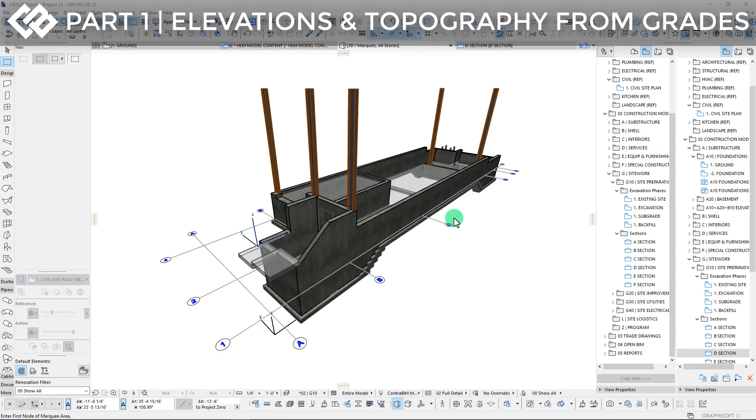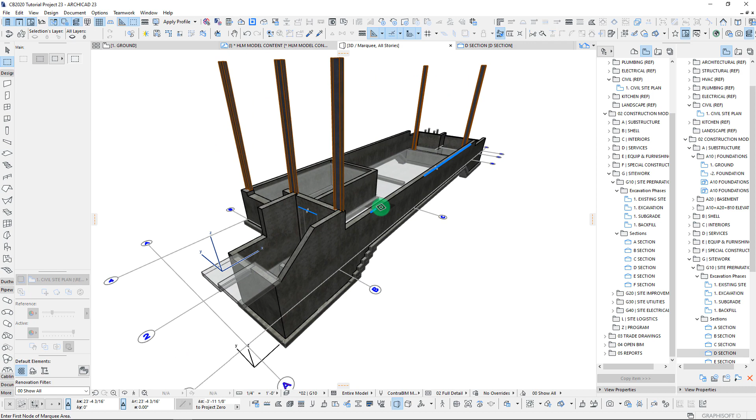Okay, welcome. In this video, we will be going through and modeling in our topography for our site. What we're looking at here is essentially our basement structure and foundations. You can see we have a lot of stepped foundations here and our whole entire basement level. We want to get our topography modeled in, because this is really going to be our starting point for working through and building up our excavation volume.

So let's take a quick look at our civil site plan here, and we'll talk a little bit about the elevations that we have, and then we will start jumping into actually modeling in the surface to represent our topography. There's kind of a lot going on in this particular drawing, but I think that's just the way the city wanted to see this.

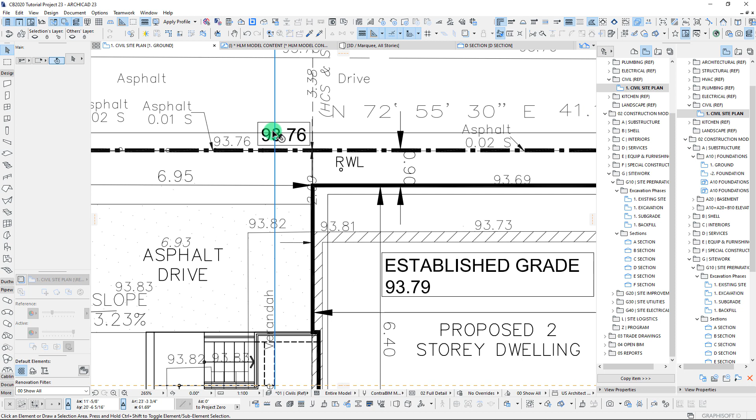I will point out that we have several different grades noted. The existing grades are the ones that are in the lighter text here, versus the new grades or proposed grades, which are darker and have a box around them. We also have the outline of our new residences here—there's actually two of them on a single site. And this hatched line running through here is actually an existing building.

So anytime I'm approaching a site like this, I always like to start with working the boundaries, by going through and tracing out essentially the extents of the topography I want to model. In a case like this, I'd want to go through and get some points in here to represent the boundaries of these structures already on site. Then from there, we'll fill in the different grades in between.

Now, if we had a drawing that was really set up with topography lines, I would approach it much differently, and I'll show a quick example of how we would do topography lines. But in this case, it's really going to be more about working with the information that we have and making sure that we can get this as accurately as possible.

So one thing I want to point out here—let's pull up a section of this particular project, one of the building sections. I want to note our base elevations. We have our ground level here, which is actually set at 0. And we can see that our 0 point for reference here is actually a specific height above grade, in this case about 5 feet or 4'9".

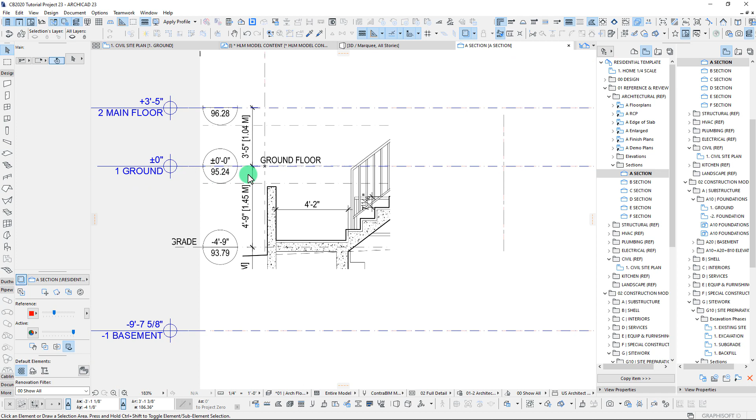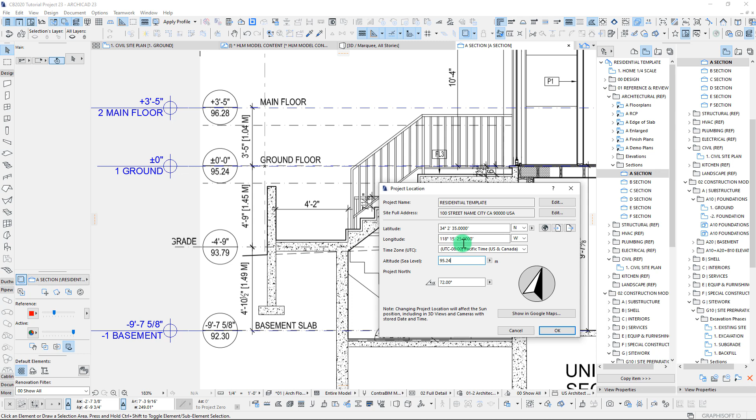So this number right here, 95.24, that is really our working point for our 0, or our project location elevation. We have this set up as 95.24. This is actually defined in meters. So when we go through and start building up our topography, we will want to be inputting these in meters.

Even though all of our dimensions and heights in most cases are actually in imperial units, feet and inches, that's one of the great things about ArchiCAD—we can switch back and forth as needed, so that when we do these inputs, we can use whatever input is needed for the available information we have.

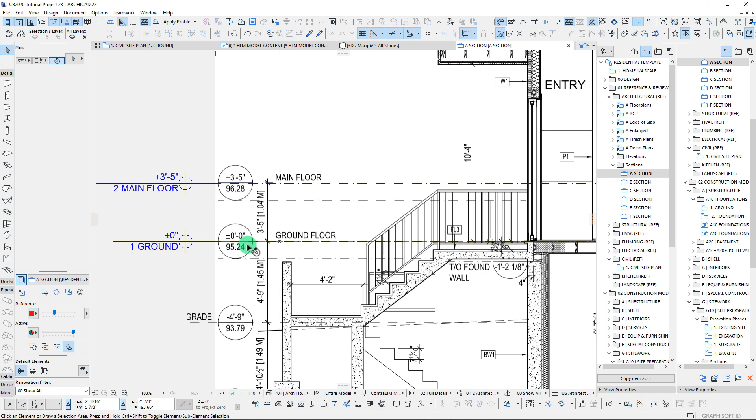So again, we've already set up that 95.24 equals our 0 point on this project. Based on that, we can then go through and start plugging in our elevations, which are also in meters here, like these 93.64—this is all in meters. Everything here is in meters for our topography.

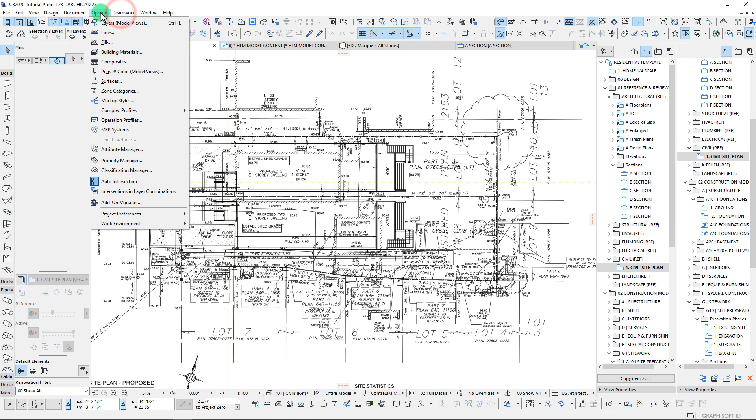So with that, let's go ahead and go into our project preferences, and we will temporarily switch over our working units from feet and fractional inches to meters. We'll just use 2 decimal points, and with that, we are almost ready to go.

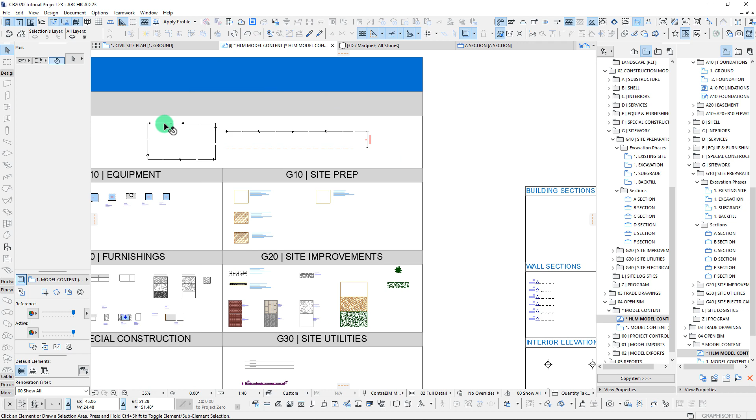I'm going to switch over now to my worksheet that has a linked reference to our model content plan. In this case, I'm just going to be picking up a mesh here that's set up for our site topo. So we're going to pick up our site existing—this is on a site existing layer. We just have it set up as site topo.

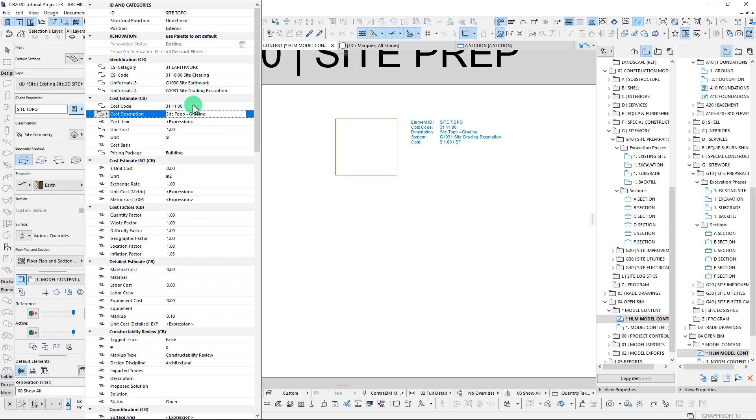We can go through and, if we wanted to set this up for calculating quantities and pricing, we can do that, of course. But for this initial pass, we won't really be talking too much about that. So we'll go through and start tracing out our boundary, and then we'll start adding some of these elevations.

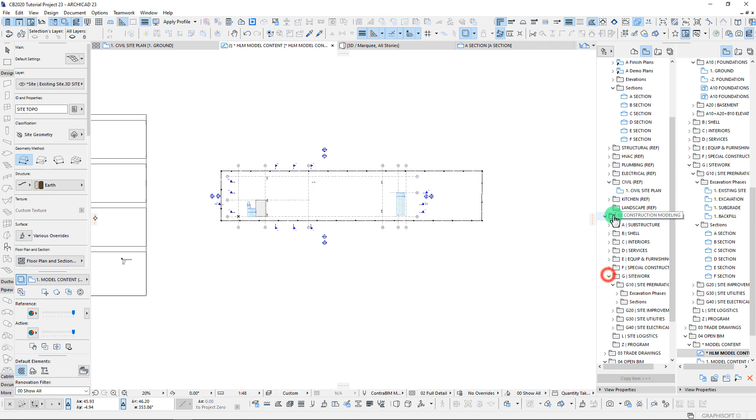I'm going to navigate down here to my construction models. I have a few different phases set up here: an existing site plan, which is kind of the existing conditions, an excavation phase, a subgrade, which is essentially after the excavation, and then we'll go back through and do some backfill in another video as we go through this process.

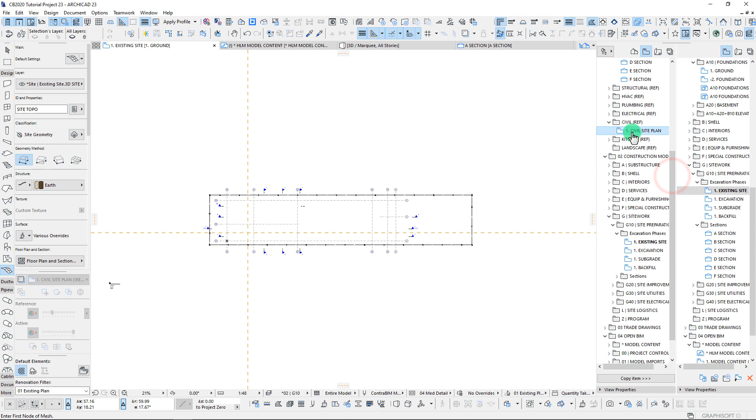Okay, first step is let's turn on our trace reference for our site plan. With a site like this, I could limit it just to the area, but in this case I probably want to pick up some boundaries beyond our actual property line. So I'm just going to start in this top right corner, and we'll do kind of the constraints or the outside bounding box of our particular project here.

We can see we have some grades up here that we can work with, so I'm just going to click through here. Off in the back over on this side, we have some grades over here too. So let's just do our extents.

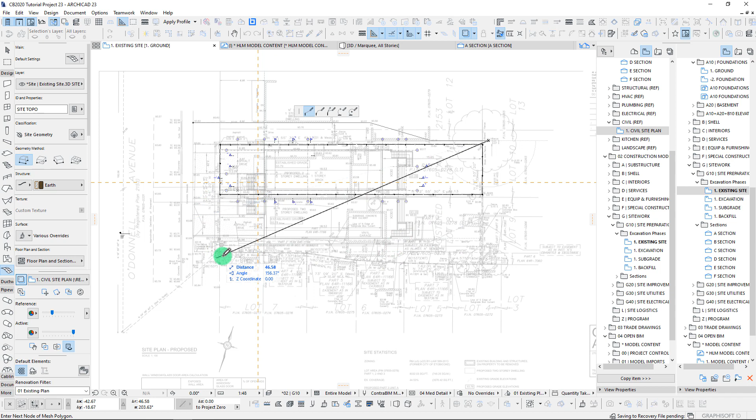We have one lot right here that contains one building, and then we have the mirror version of it on the southern part of the site. So let's take this down, and we'll take it a little bit outside of our boundaries here.

I'm just kind of looking for some points here that we can match up to our elevations. We're not going to go too much into detail here, just enough that we can get a nice boundary outside of our site. Okay, so there we go.

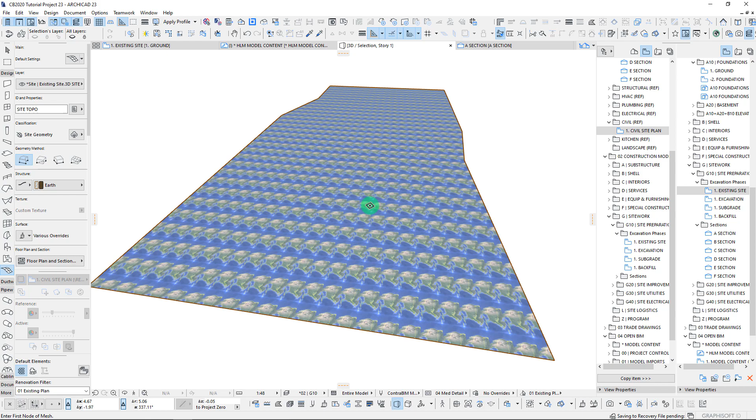We have our mesh. If we see what this looks like in 3D, we can see that we got this kind of funky texture going on. Actually, if I zoom in and look at it, this is just a placeholder here for loading in Google Earth satellite imagery.

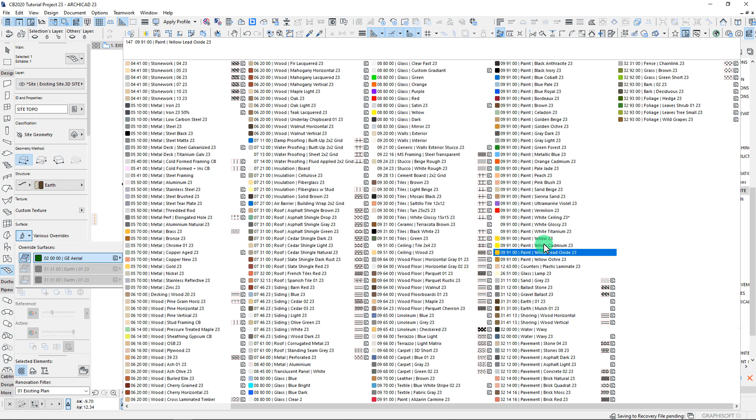Because a lot of the time when I'm doing these topos, I'll actually map some imagery to the surface. But in this case, let's just go ahead and override this with an Earth type texture, and that's good enough for now.

One thing I want to point out that I didn't talk about before we started getting into this is our elevation of our topography here. Right now this is all drawn as a single plane. We can see it's actually set to minus 0.05. Let's see if we can just zero this out.

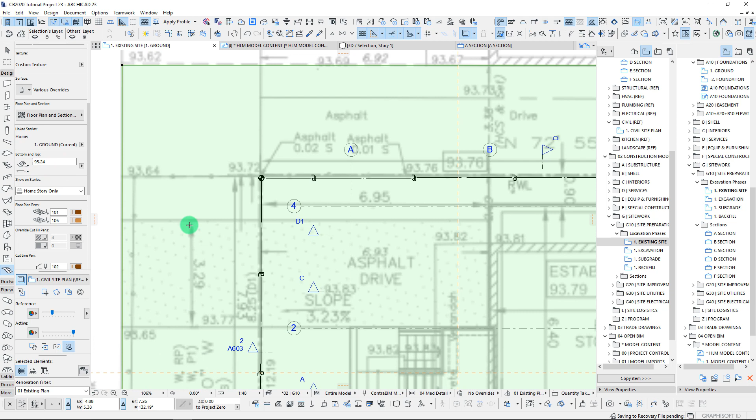Right now we're set exactly, if we switch this to our sea level, we're at 95.24. As we zoom in here, we'll notice that most of our grades are actually lower than that, because the 95.24 is our finished surface of our ground level, which is about 5 feet above our finished grade. Remember that 5 feet kind of translates into meters here as well - 95 to 93 is close to 5 feet.

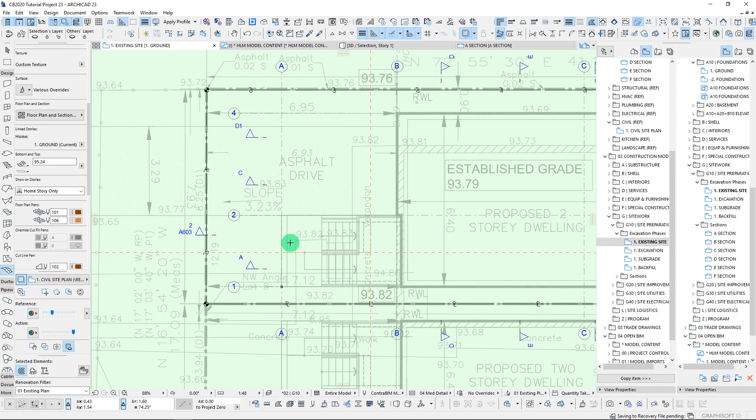And so right now we just have a standard flat mesh that's been modeled over this entire site. So the next thing I want to do here is let's actually take a slab, and I'm just going to leave this on a slab on grade layer.

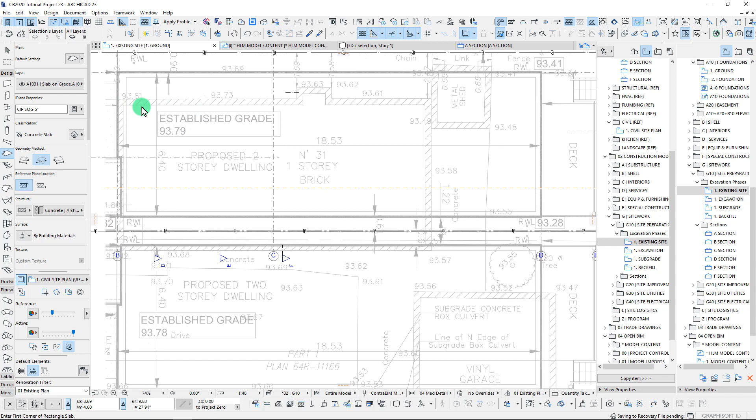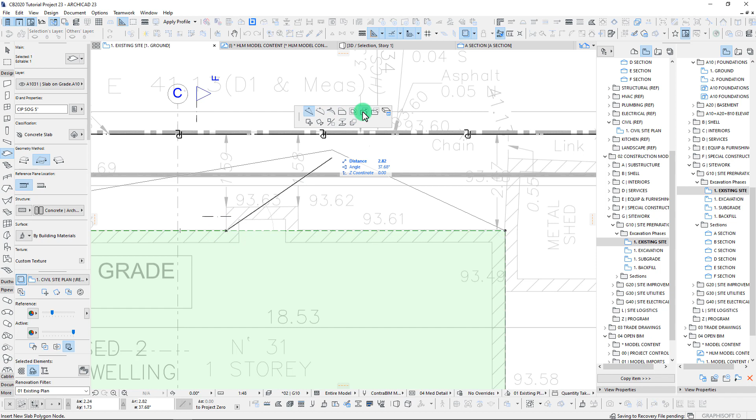And we can set this as a demo layer, because what I want to do next is, since we have this building already drawn in here, the existing building, I just want to go through and get some massing in here for what's existing here, because this actually has some good grades running around it. So we're going to map out a slab here to represent this existing building.

We can do the same thing over here with this shed, so we'll add one right there. And we also have this garage.

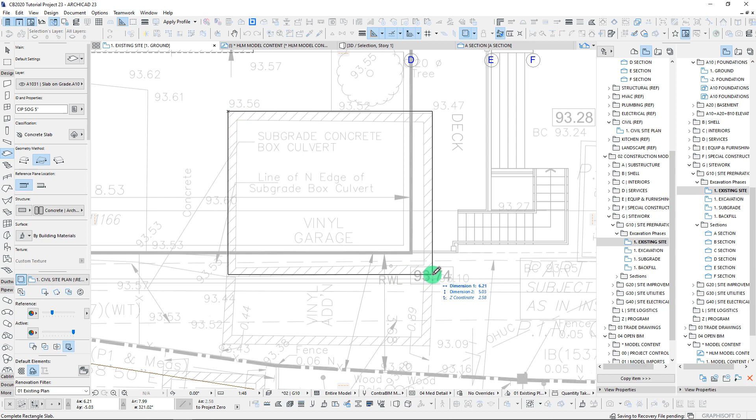So these don't have to be 100% perfect. I'm not worried if we're off just a little bit there. This is really just more for getting us pretty close to our actual grades and bounding box, essentially.

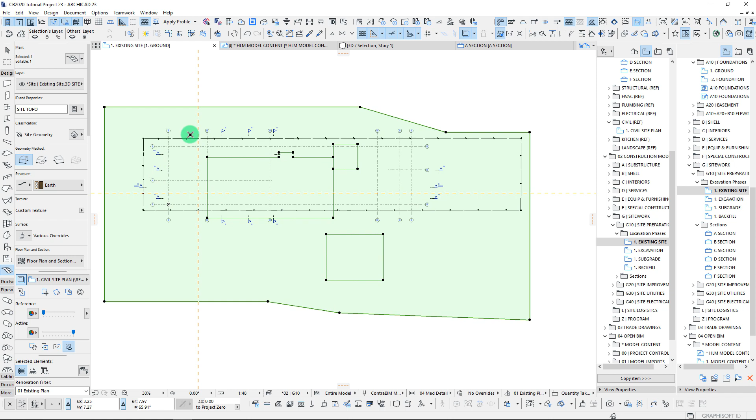So, okay, one thing I'm going to do is turn off our trace. And with this topography selected, we can actually use our magic wand, click here, and we're just going to create some new points. I always like doing this first so we have these set up. So now as we go through, we can start creating points that are going to be working from essentially the inside out.

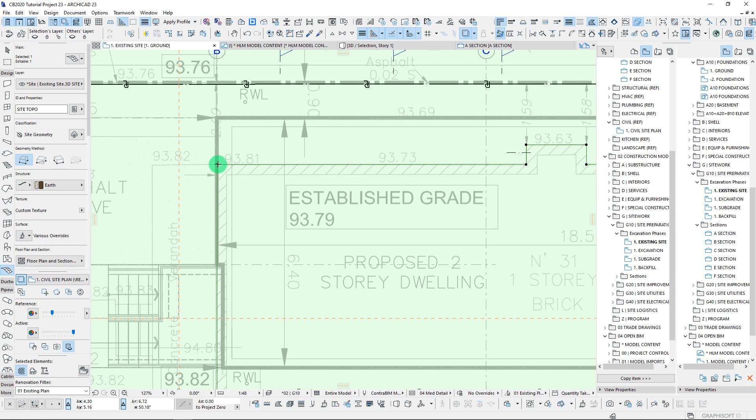So if we take a look at this in 3D now, we can see exactly where those buildings occur. All we need to do is start going through, turn back on our trace here a little bit, and go through and start setting these elevations. Of course, we need to change our input to sea level so that we're matching our points here. So now we're just going to set this at 93.81, and work our way around our project here.

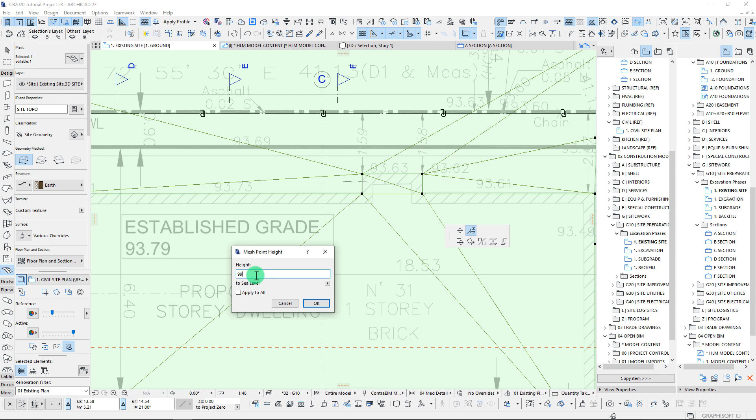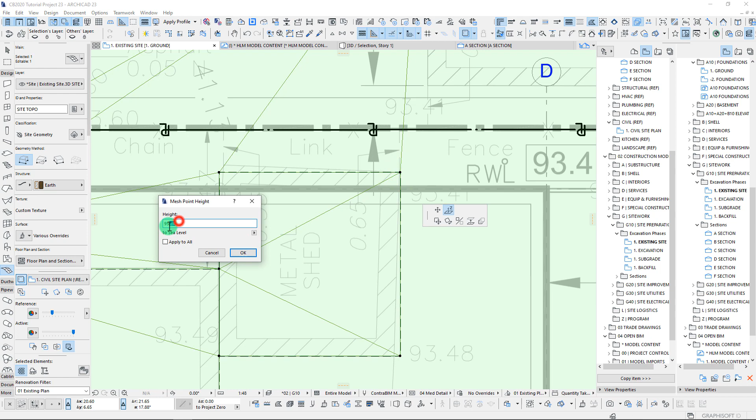93.63, I'm going to use that same value for all of these. 93.63. 93.62 on this side. 93.62. We'll just go through and trace these out. If we don't have a value that's exactly by our point, we're just going to try to get really close. So 0.49 there, 93.43, 93.41.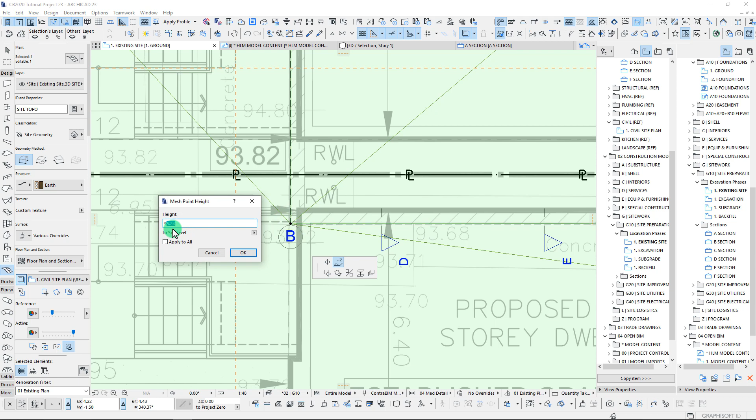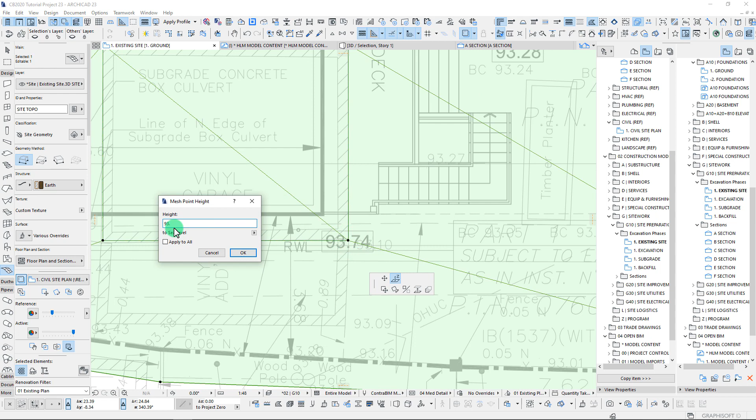As we're going through this, it's always good to bounce back and forth to make sure we're not missing any points here. Let's continue on. We'll finish out this existing house structure, and let's do our garage here as well. 93.56, 93.47, 93.1 - again, we're using this value, not this one. So it looks like we'll be raising that grade a little bit. 93.53. Okay, I think we've got pretty much all of these in.

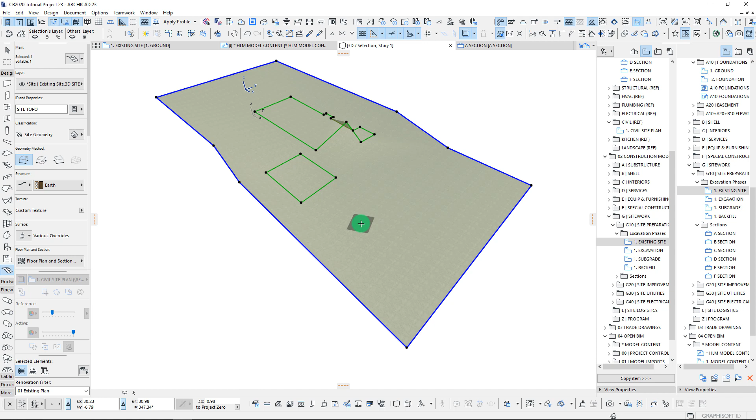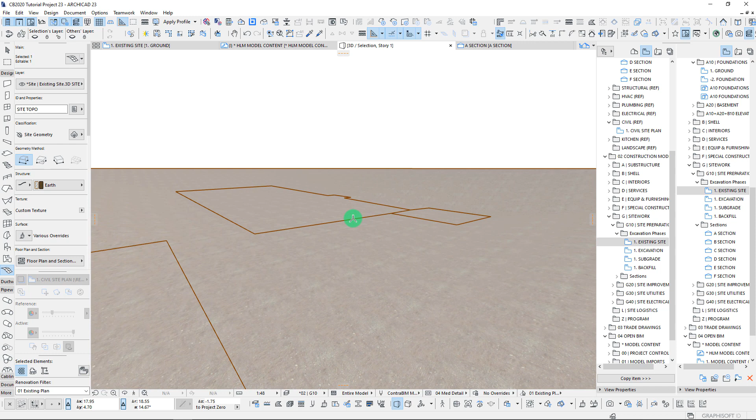We haven't touched our perimeter just yet, but let's temporarily take a look here and see what's going on. The things I'm looking for are any points that are very jagged, meaning I totally missed the elevation point. With one like this, I'll just take this and drop it down so it's right next to an adjacent grade here. Okay, so we've got these points working.

Now it's time to do our perimeter. We'll start up here in this corner. So 9, and we need to change our input to altitude, 93.62. 90, change that again. Okay, height to altitude. It's funny that that went to 0. So 93.59.

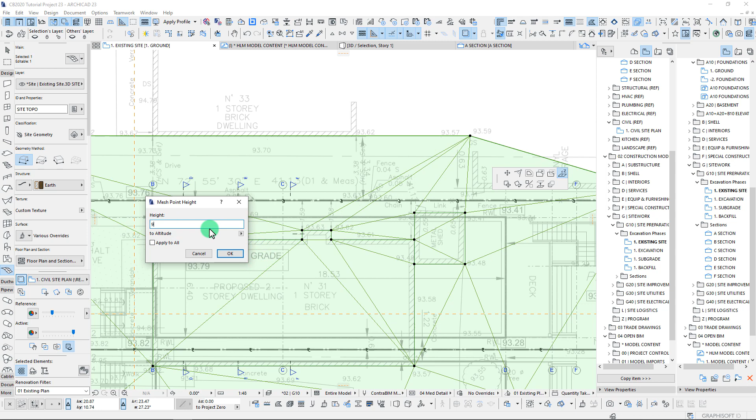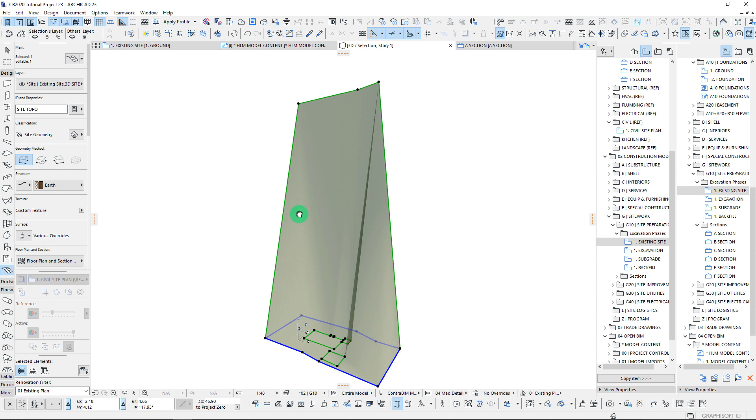93.18. I want to check this real quick to make sure we didn't push this really far out here. Yeah, something happened there, and I think I had adjusted - I'm setting these based on that height. So why was my input off there? Let's try this again. So we are doing this to - oh, I had it set to altitude. We needed it set to sea level. That's why.

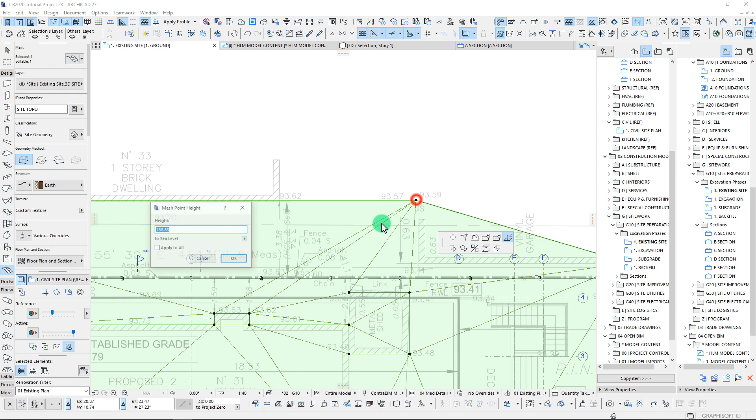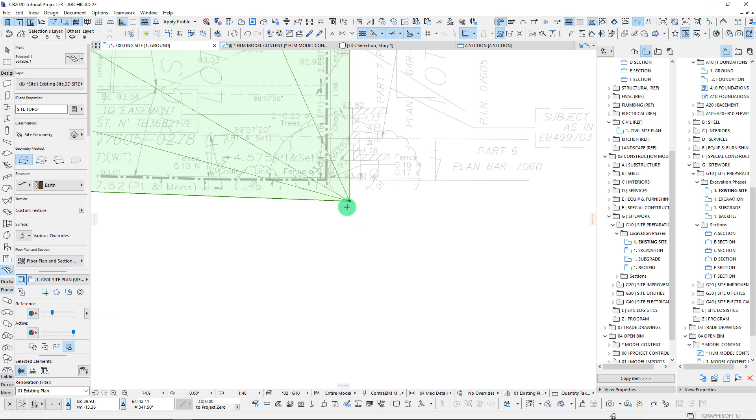93.62. It's always good to check before you go through and do too many of them. So 93.59. 93.18. 92.77. 92.97.

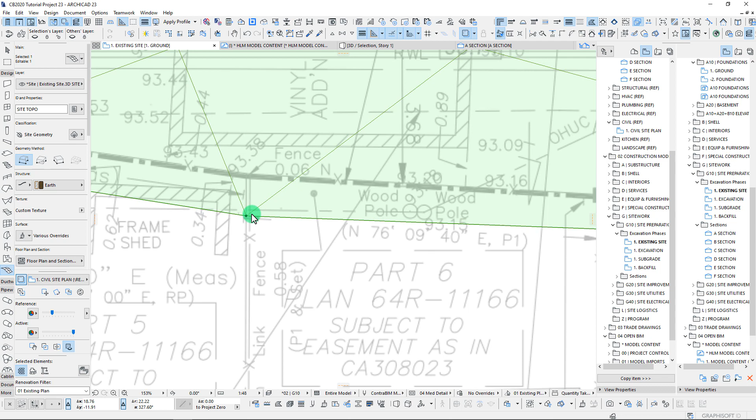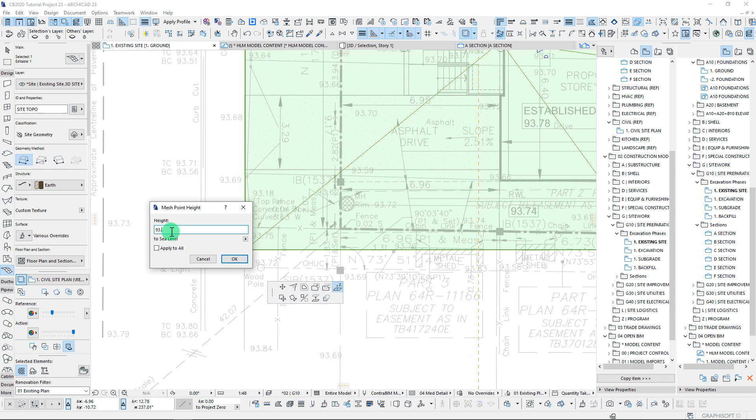The closest grade here that I'm seeing is right here. So we'll go 93.38. 93.6. 93.77. Okay, let's check it now. All right, we are starting to get much closer here. We can see that we drop off a little bit on this corner, but that's okay - that's exactly the grades that they had specified. We are moving right along here.

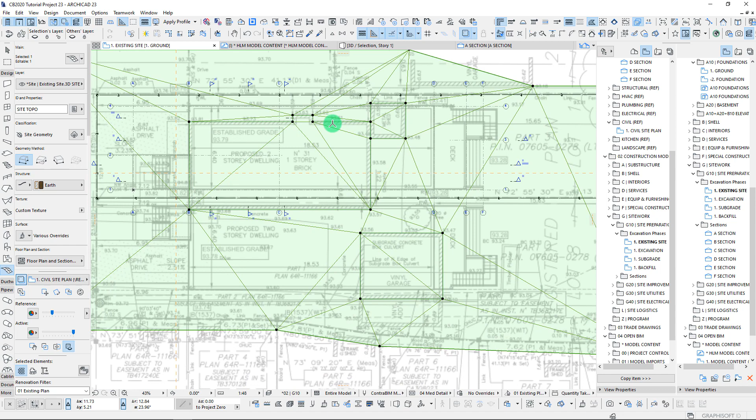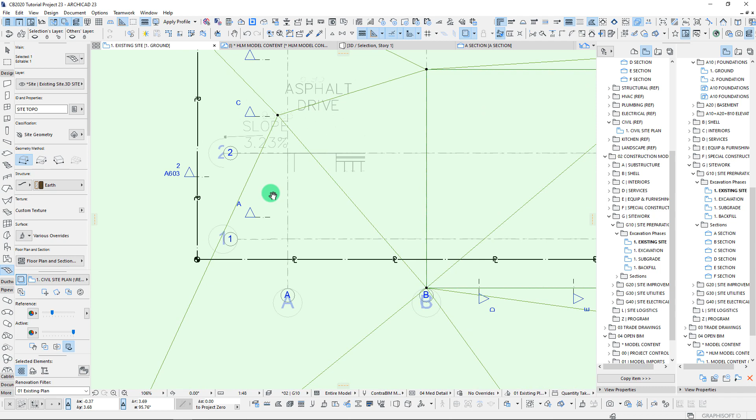Now that we've done our existing grades around our buildings, it's time to go through and start populating some of these more intermediate grades. With this, I'm just going to click right in the center here. We'll create a single point and start doing some spot elevations. We can see this is already pretty close to where it's intended to be. Let's go through and plop a few elevations in here, and quickly dial this in so we have really accurate grades.

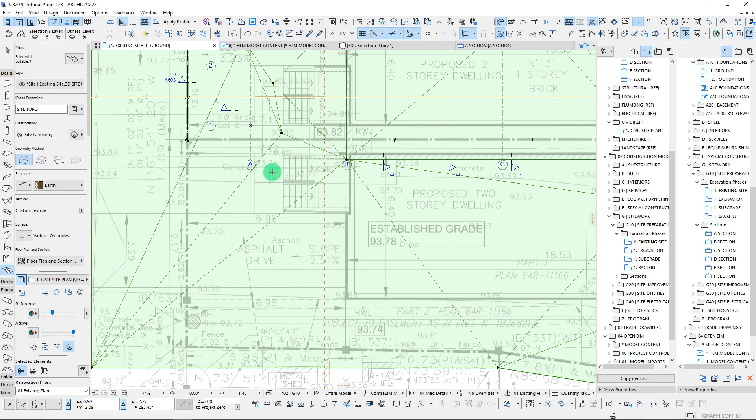93.82. 93.70. 70. 66.

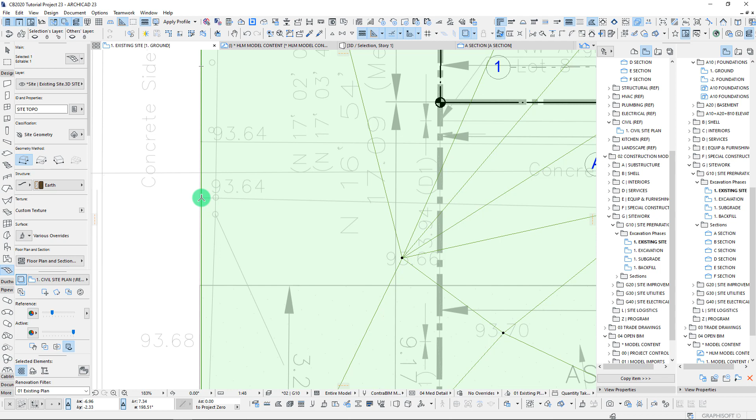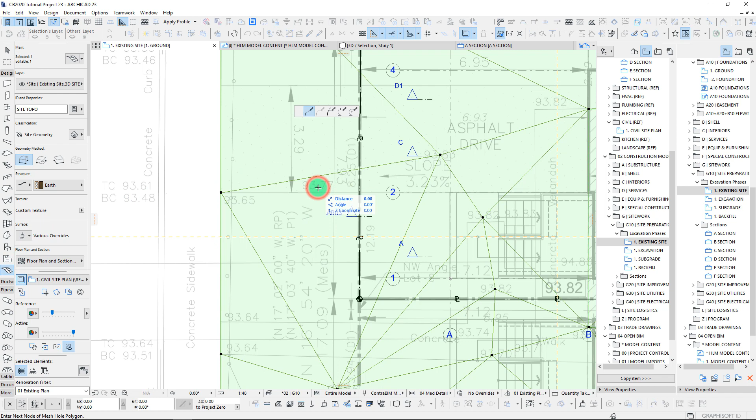We can give some points along the perimeter as well, just by adding a point here and then adjusting. So 93.64. Whenever you're doing these inputs, you really want to make sure that you're always on your mesh tool, otherwise it doesn't necessarily want to cooperate as easily. If you ever have an issue creating the points - like if I hit escape one more time, we'll get off that tool and I can still select this, but going in right now, I can't add that point as I was before. You really need to make sure you're on your mesh tool, and then you can start drawing on top and adding these points. So if you ever find you're struggling to add the points, double check and make sure you have your mesh tool selected.

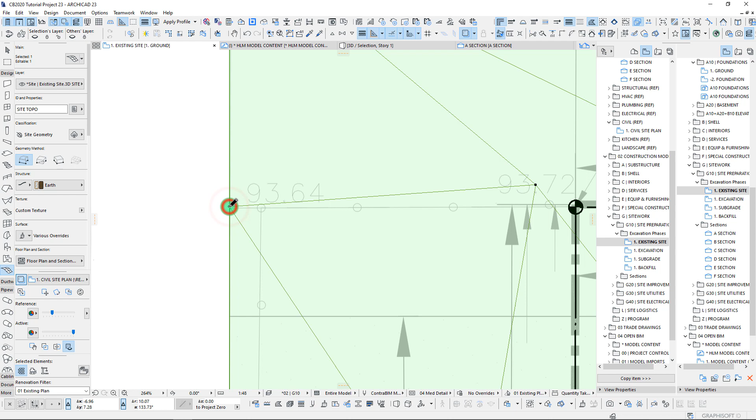So okay, we are working through this here. Oop, that one's perfectly on already. Let's get one right on this perimeter right here. So 6.4, yeah, we're really close now. Let's get a few over on this side. 0.73 - so that one's going to bring us up a little bit. Let's do 0.76.

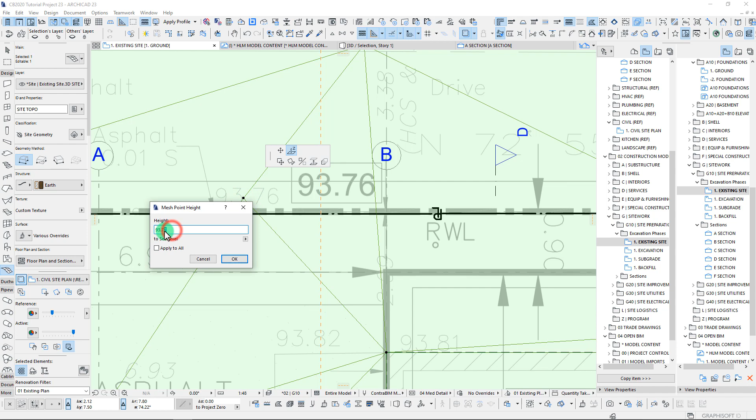After we finish this, we'll show the other method of how to do this if you had topography lines to work with, which obviously we don't in this particular case, but that's another method that often can really help with these inputs and speed things up if you have that information to work with.

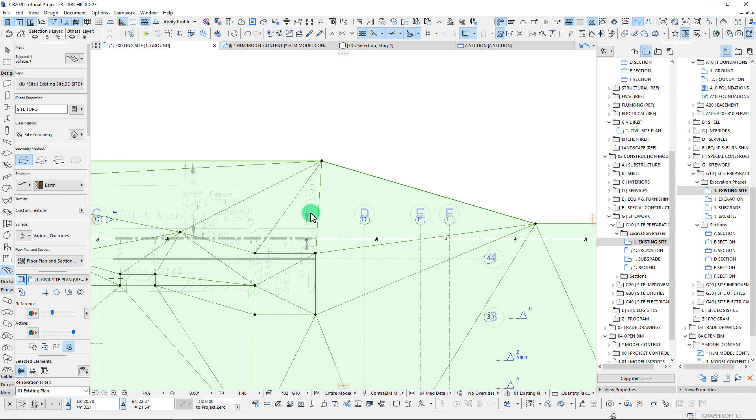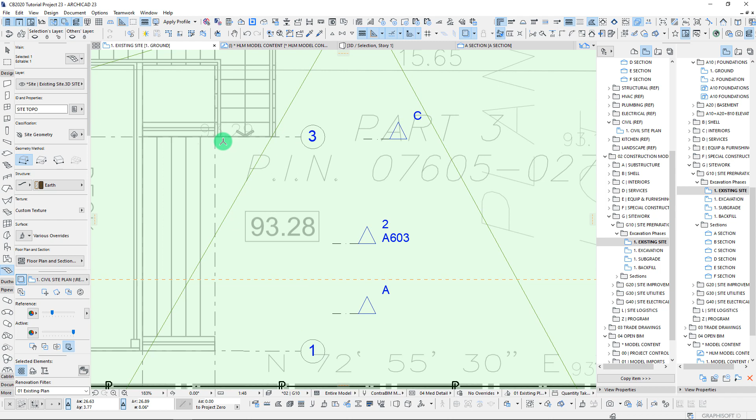So let's see, 0.62. Yeah, you can see that we are only adjusting these just a fraction at this point. 93.17. That's 0.05 meters, so not much at all. 93.28 right here.

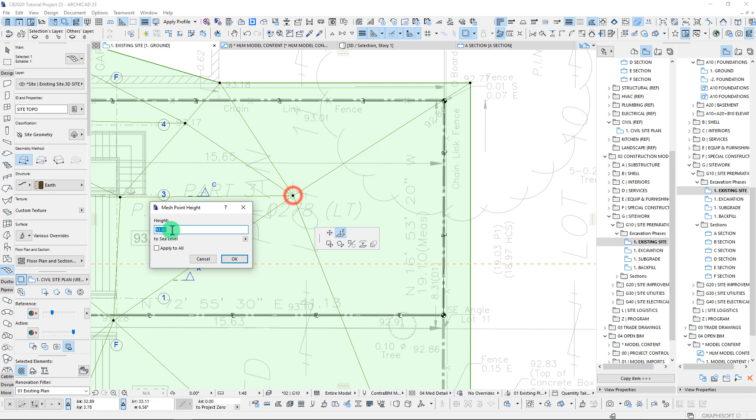Okay, we are almost there. 93.11. And we really don't need to do all of these over here. We can always go back in and add more later. We just want to make sure we have enough around our building and that things are as close as possible. So we'll just do a few more here.

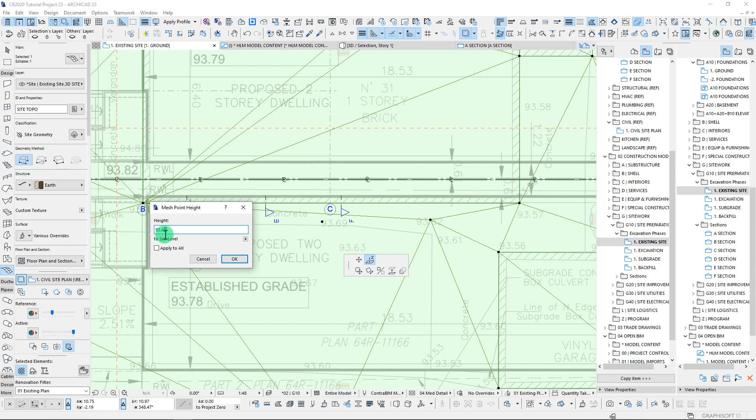Oops, what did I do there? Oh, we added it, but right now there are no changes. That's why we don't see any of these contour lines, but as soon as we add it, we'll get one.

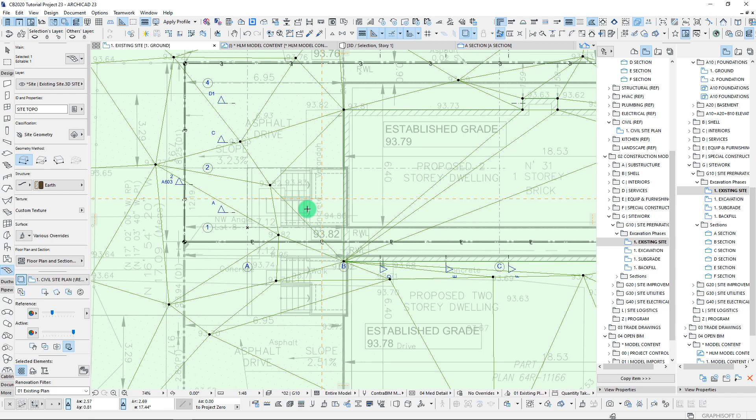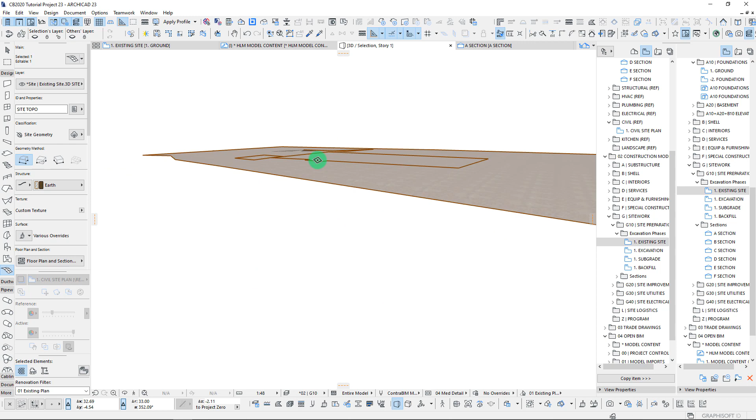Okay, there we go. Let's check it out. So there's our topography. It's a pretty flat site. There is some variation here, but we got this in.

So what's awesome now is if we start taking a look at some of our sections here, like let's just take a look at section A, which is running through our building. You can actually see that we already have turned on as a trace reference our architectural section here.

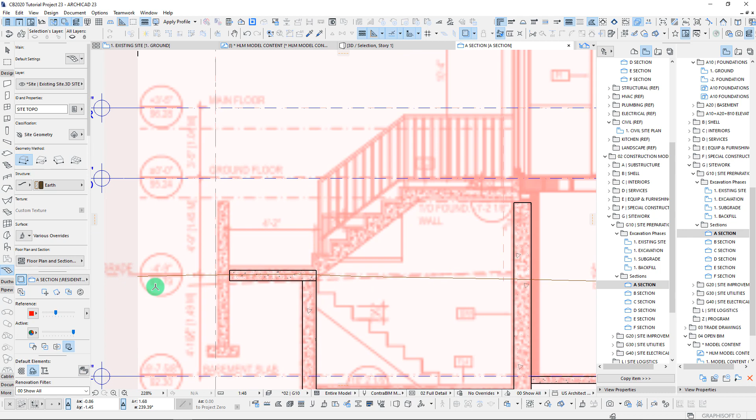If we start in the front, we can actually see that the grades are a bit different than what is being shown in the section. So maybe these grades here are intended to be the new proposed grade versus the existing. Looks like this may have been the existing grade, so we are right on in that case.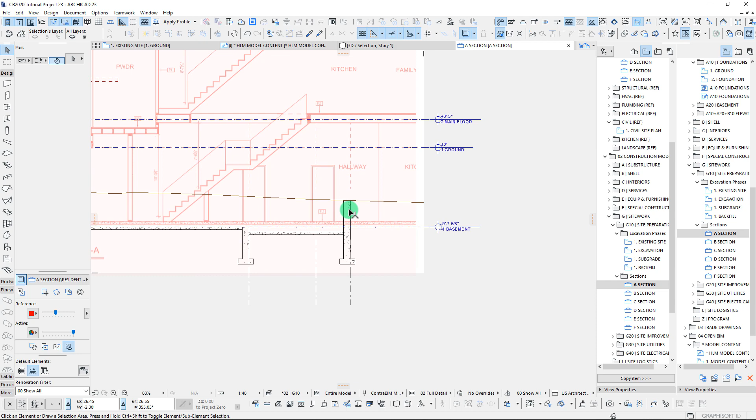On the back side here, we can see that we are pretty much right on exactly where we want to be to transition from the stairs going between the basement and the main level. So yeah, we can see the sloping on the site.

We can pull up a few other sections here. Let's pull up section C. Once again, we have our trace already kind of turned on just as a reference plane here. We can actually see in this case where that demo slab is, which we probably want to adjust down.

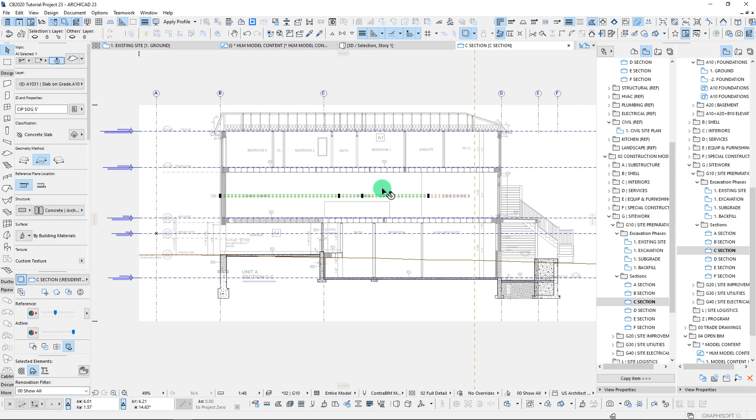We'll actually go through and make some adjustments using these slabs later on, but for the moment, let's just pull this down and we will kind of set this right in this area as the existing grade there, or the existing established grade.

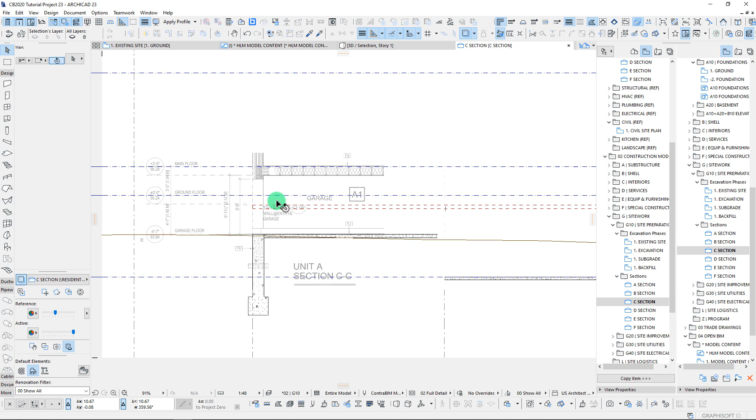All these are elevated main floors, so we'll go through and do some massing with this later on, which will be something that we'll use to really dial in our excavation volume to incorporate the existing basement on the site. So that will be fun.

I think I copied that instead of just dragging it. So yeah, we can see here our different elevation changes, but we are pretty close in line with what was anticipated there. Let's cut through the other direction.

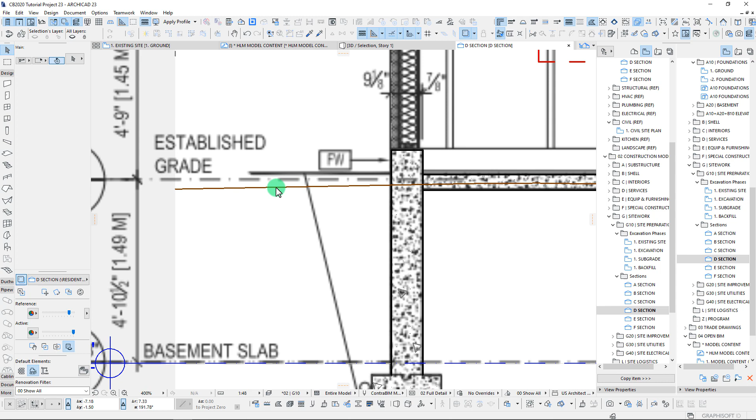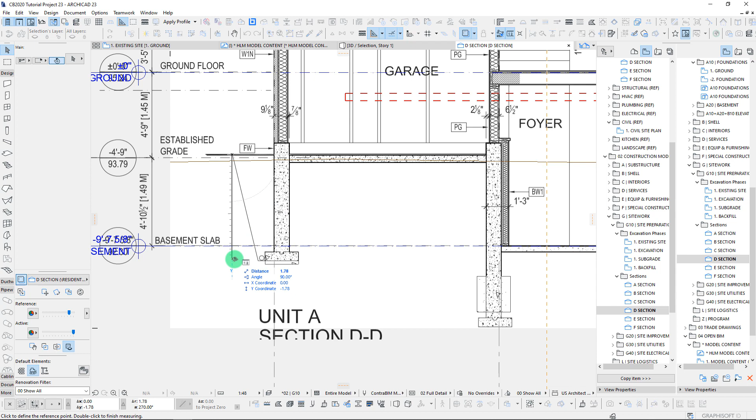Section D. Here we can see that we are slightly off. You can actually see in this section here they have some anticipated cut lines, which are pretty steep. Often you won't be able to do more than like a 1-to-1 depending on the soil conditions. So this might need some sort of retaining structure, some shoring, which we will talk about later in this video sequence. On this side over here, we actually have the existing property to work with, so we can set this back as far as we want.

And so okay, let's just cut one more here. There we can see our grades. We're pretty close in that case.

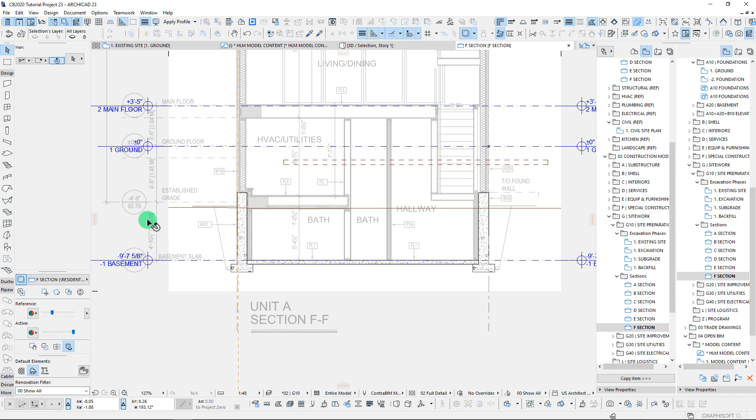All right, so I think that probably takes us to the end here of getting our initial topography modeled in. So we're off to a good start.

In the next video here, I actually want to do a really quick one on adding in some property lines that we can actually see in our section. So next video, we'll do a quick little trick on how to use morphs to create some property lines that show up in 3D, 2D, and in section. We'll do a short one there, and then we will start getting into actually some of the excavation massing after that.